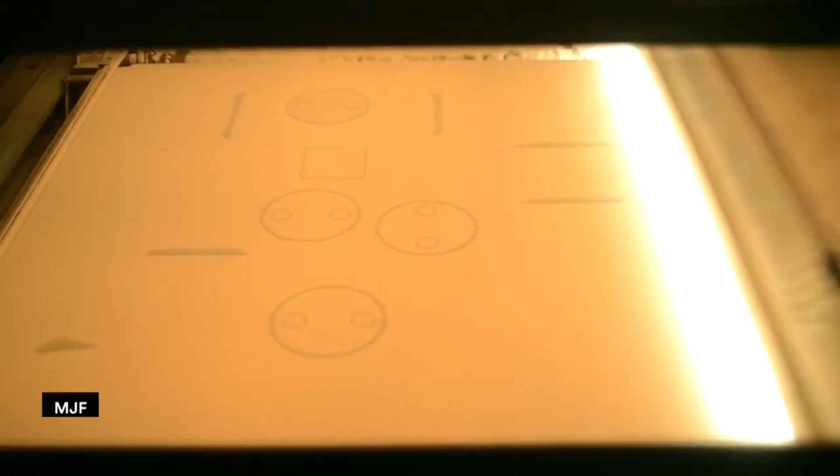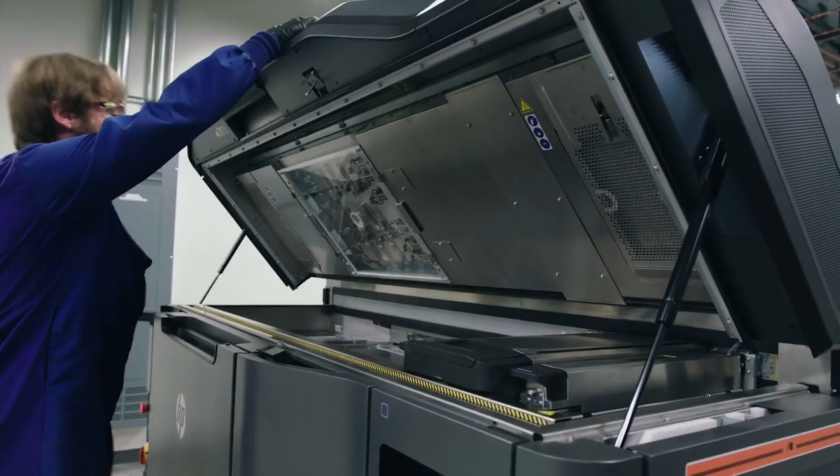Here I want to share about one advanced machine, which is multi-jet fusion in 3D printing. Multi-jet fusion (MJF) 3D printing is a high volume, high accuracy additive manufacturing technology developed by HP Additive. HP released the MJF printer for commercial use in 2016.

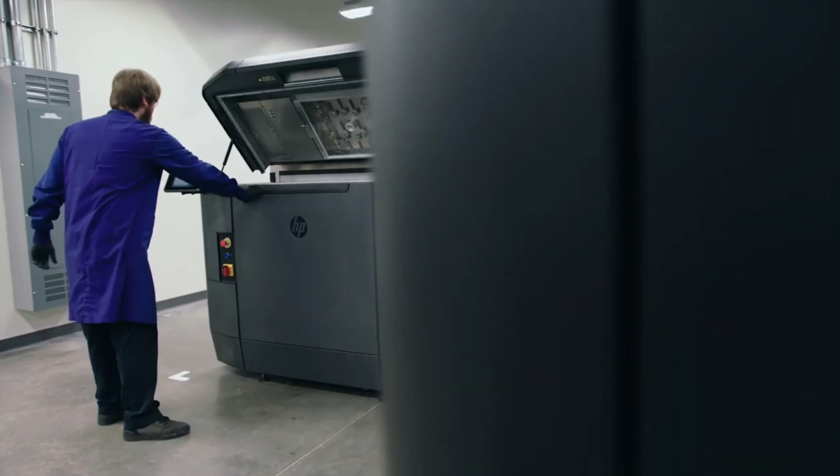Multi-jet fusion works by applying a fusing and detailing agent to a thin layer of powder in the shape of the part's cross-section at a specific layer height. A heat source then fuses the powder into the final part. The print bed moves down by the thickness of one layer, typically 80 microns, and the process is repeated.

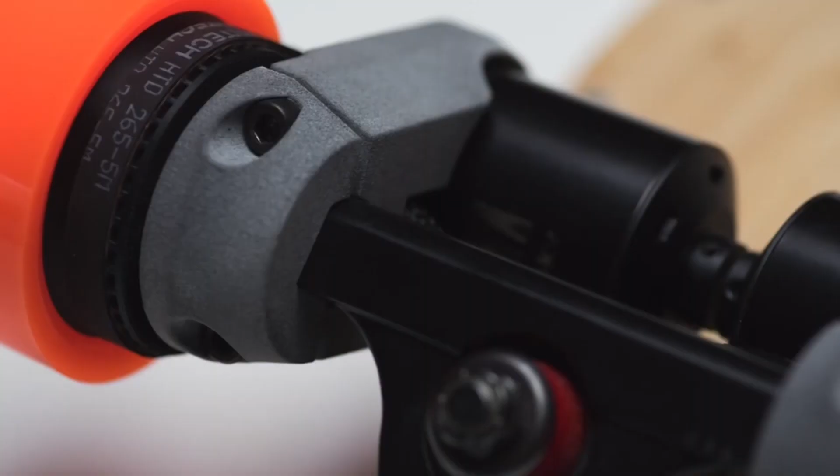MJF is a relative newcomer to the additive manufacturing field when compared to older technologies like SLA (stereolithography), FDM (fused deposition modeling), and SLS (selective laser sintering). MJF was first introduced to the market in 2016. MJF was developed by HP Additive, building on the company's expertise in inkjet printing technology and precision mechanics.

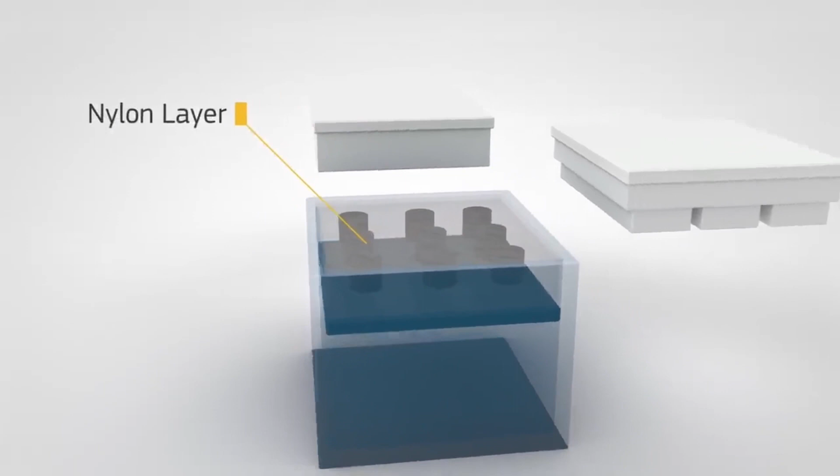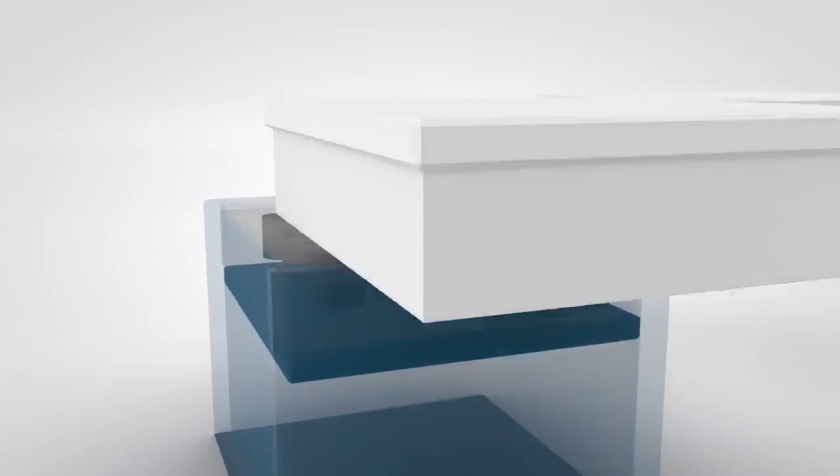Once the nylon material is loaded in the 3D printer and digital instructions are programmed, the print carriage moves across the powder bed as production begins. An inkjet array selectively applies fusing and detailing agents across the powder bed, which is then fused by thermal energy into a solid layer of part geometry.

Powder is distributed by a material recoating unit, and the process is repeated layer by layer until the build is complete. These are the main steps in MJF post-processing. Firstly, cooling. This takes place within the build unit. HP offers modular units for natural cooling, so the build unit can be used for a new print without having to wait for the powder and part to cool.

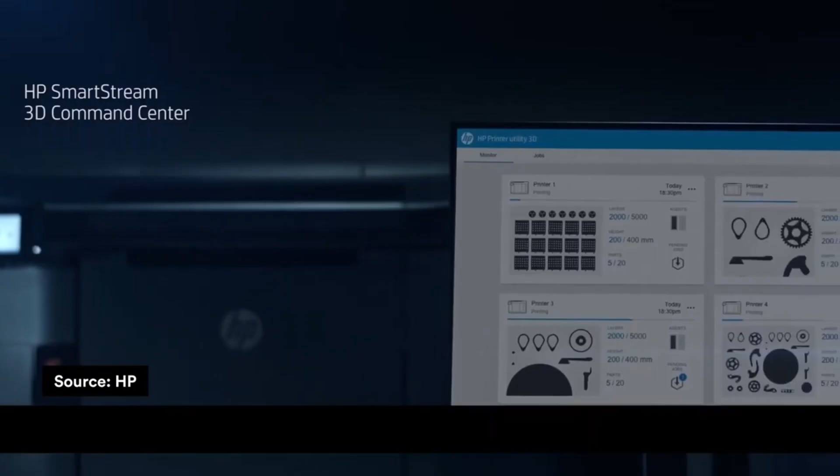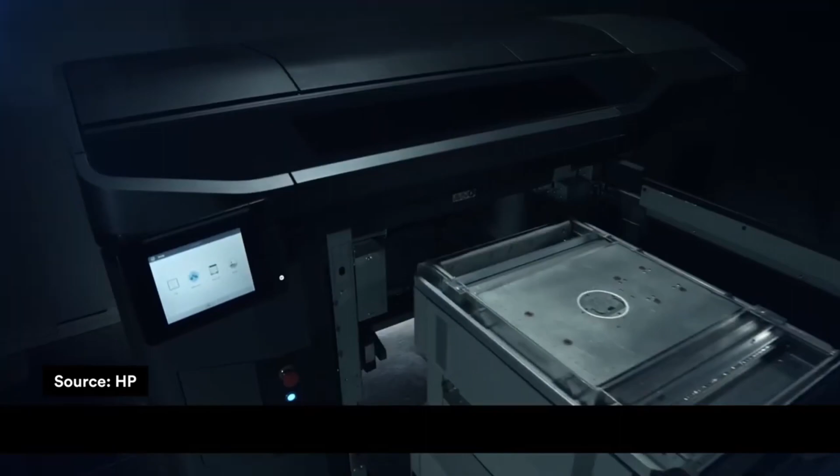Secondly, recovering unfused powder. Once the build unit has cooled down, move it to the processing station and vacuum the unfused powder into a container for later use. Lastly, bead blasting. Remove any remaining powder with bead blasting, air blasting, or water blasting. You can do this manually or automatically using a tumbler, ultrasonic cleaner, or a vibratory finishing machine.

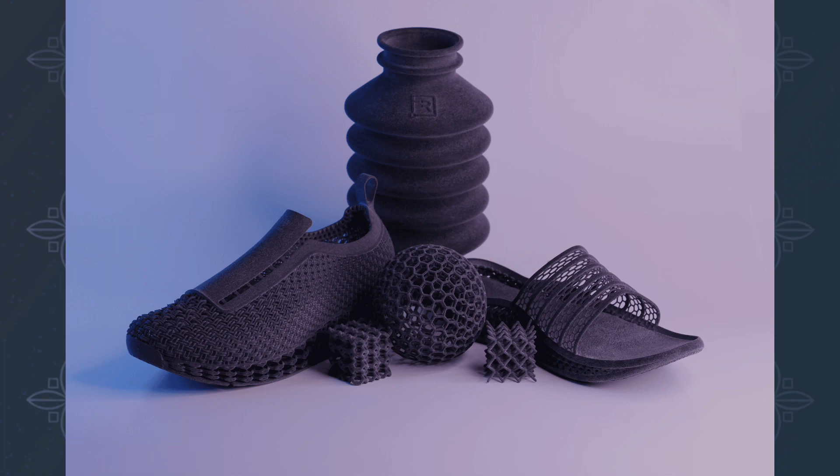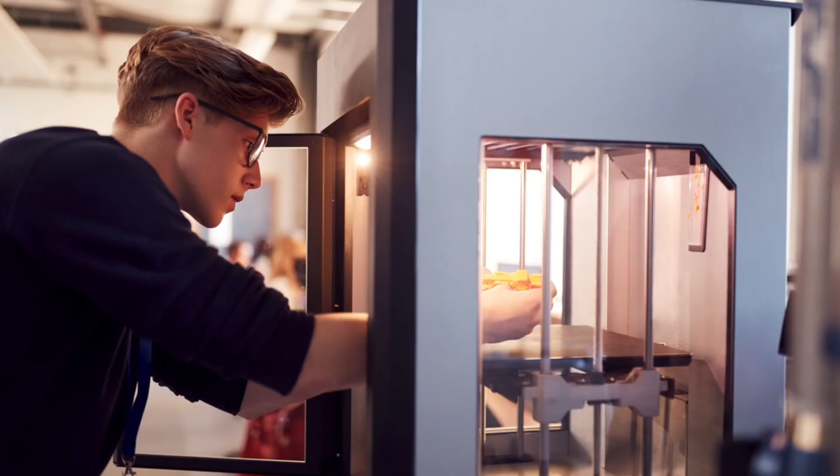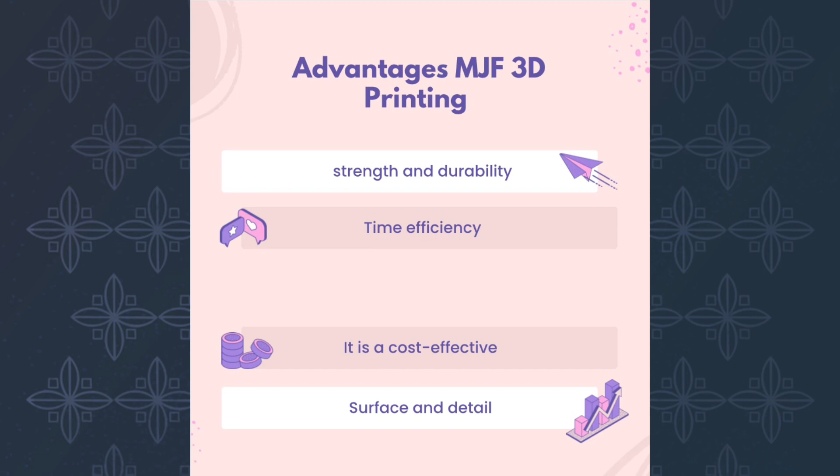Advantages of MJF 3D printing are, first, strength and durability. Nylon material has strong mechanical and durable properties, perfect for end-use parts. Secondly, time efficiency. Designs can be made quickly with a minimum of material waste while maximizing strength and complexity. Thirdly, it is cost-effective. And lastly, surface and detail. MJF has tolerances and features down to 0.1 mm.

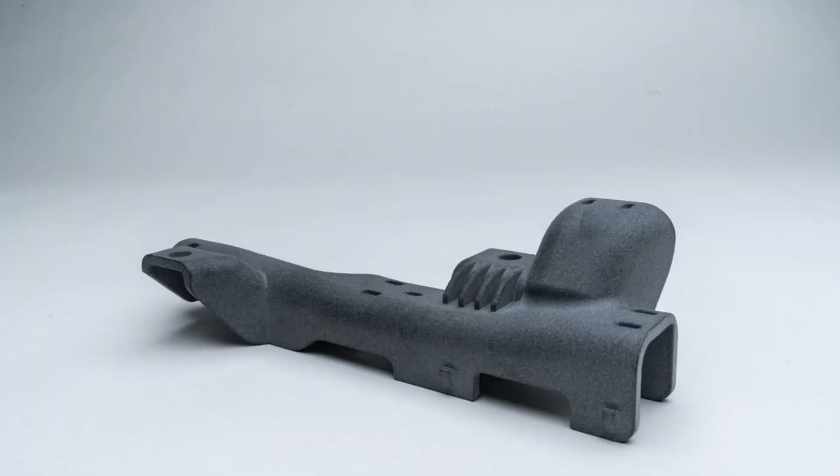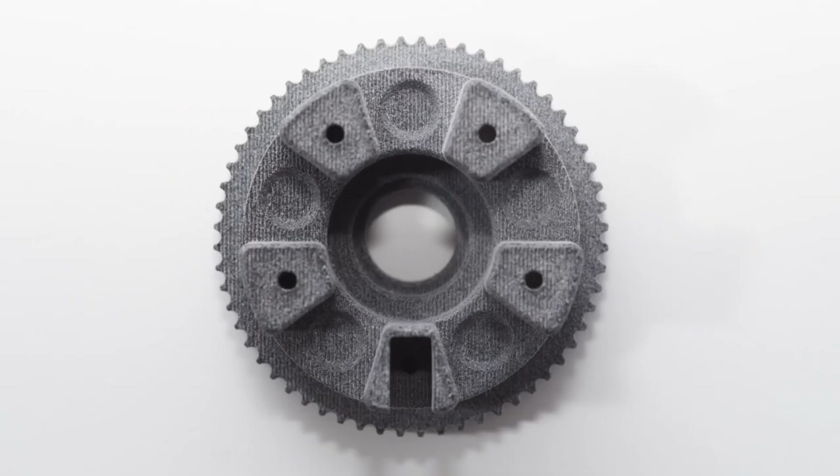Disadvantages are a slightly rough surface, and only single color models are possible for MJF printers.